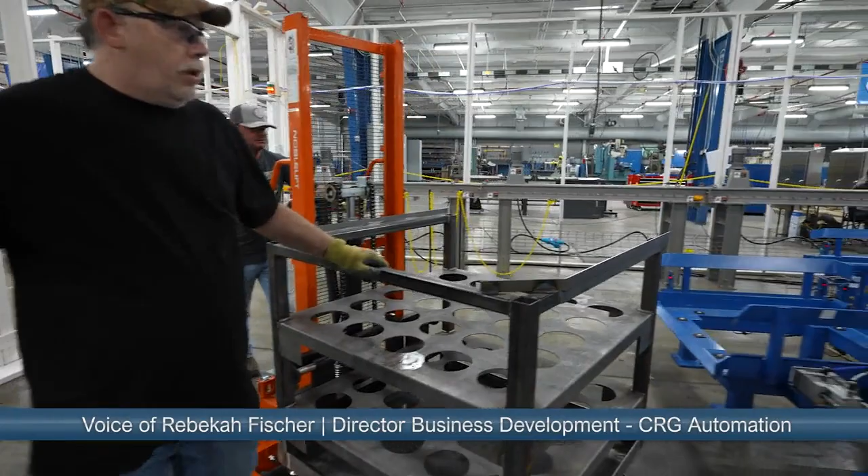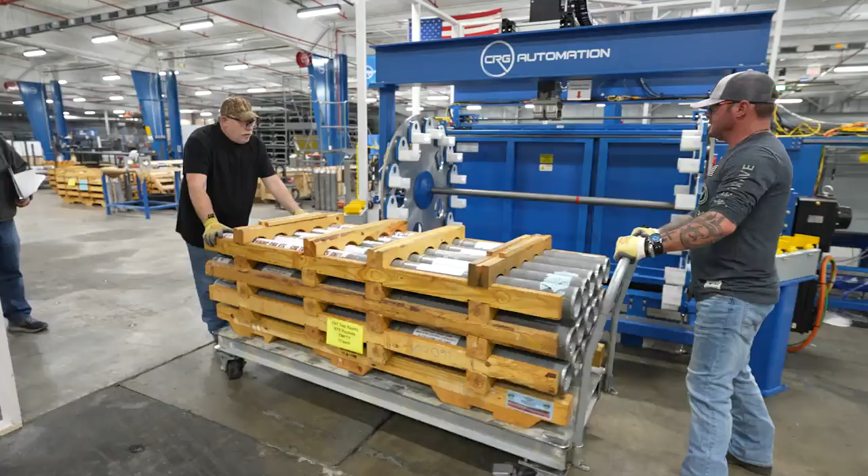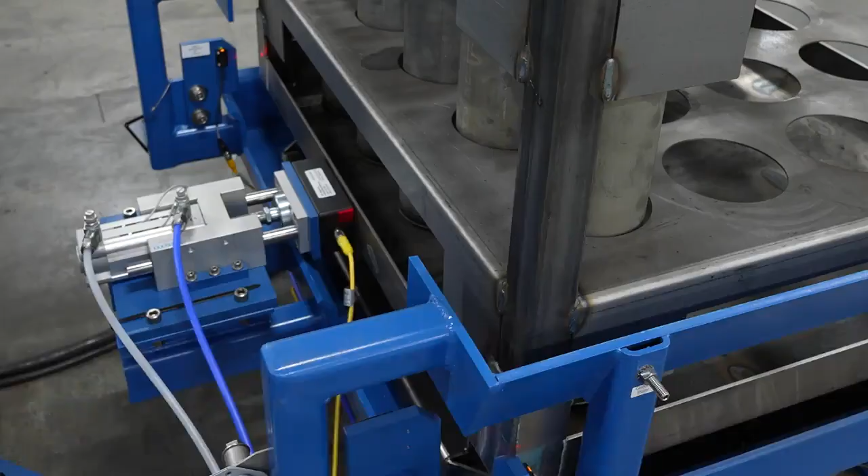To begin operation, the system must be preloaded with 3 Rocket Warhead Containerization System skids, 2 rocket motor crates, 2 upper shipping and firing tube containers, and 15 M55 rockets. One skid will have 25 empty canisters, the second skid, 5 empty canisters, and the final skid completely empty. The RWCS stations will have magnetic pullers and pneumatic pushers to locate the skids consistently for robot operation.

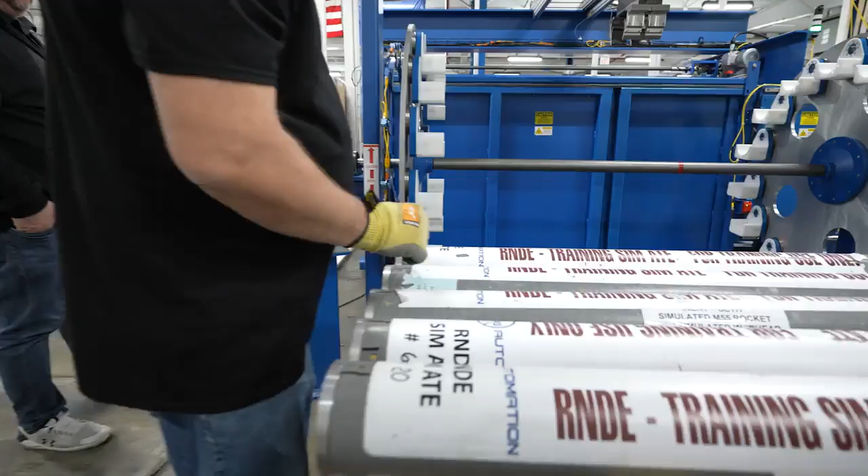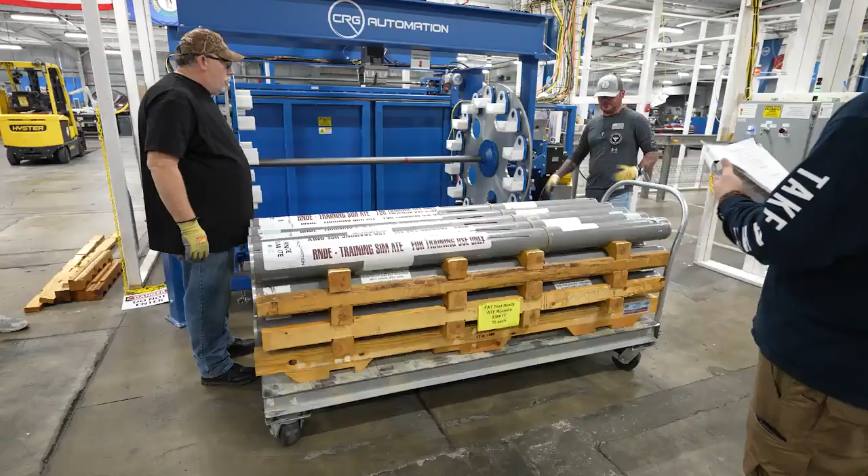4 pallets of M55 rockets will be brought into the unpack area to begin the process. This will allow a total of 60 rockets to be processed. The forklift operator places an M55 rocket pallet on the adjustable height unloading table. The operator will then mark the shipping and firing tubes, or SFTs, at the 12 o'clock position to maintain storage orientation. 2 operators will then load the rocket non-destructive examination input carousel cradle.

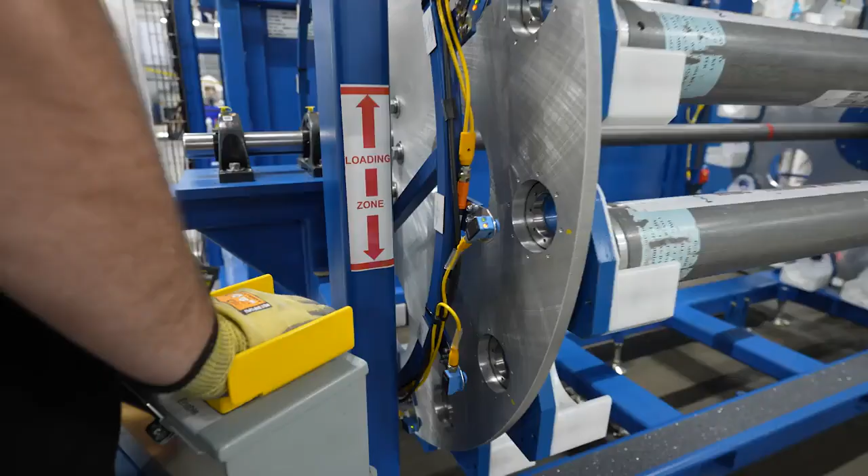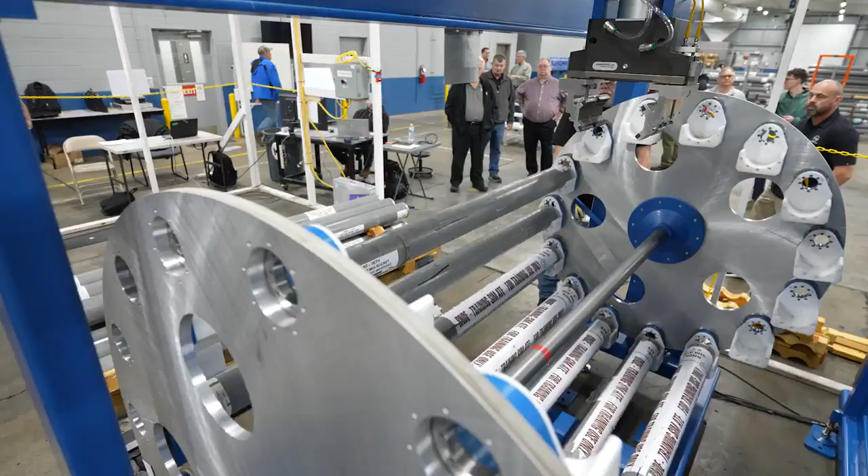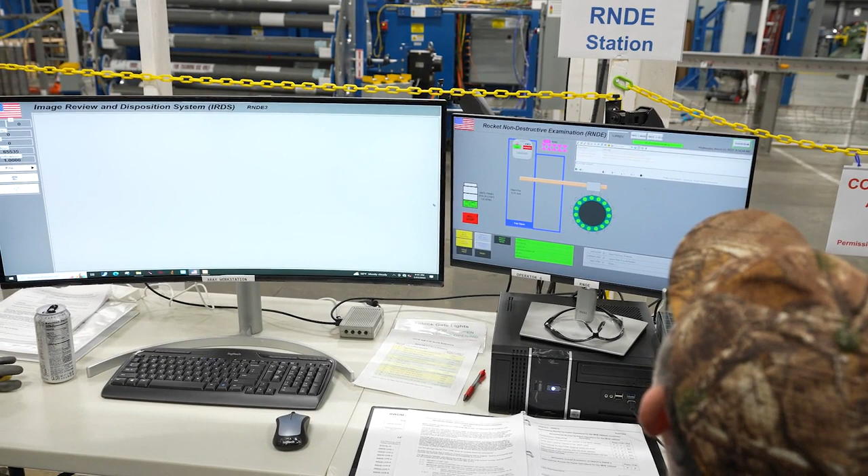Utilizing 2 sets of indexing control stations, one on each end of the carousel, each operator will press the button on their end to index the carousel to the next open position. The operators will then repeat this process until 15 shipping and firing tubes are placed in the carousel. Once the input carousel has been loaded and the unpack area operators have left the room, the control room operator can start the scanning process via the Human Machine Interface, or HMI.

Once the HMI commands have been given, the 2-axis robot will pick up a shipping and firing tube from the carousel and place it into the X-ray cabinet and close the top door. The X-ray motion sled translates over to the scanning zone and tilts the SFT 10 degrees down to allow for easier liquid detection in the M56 warhead.

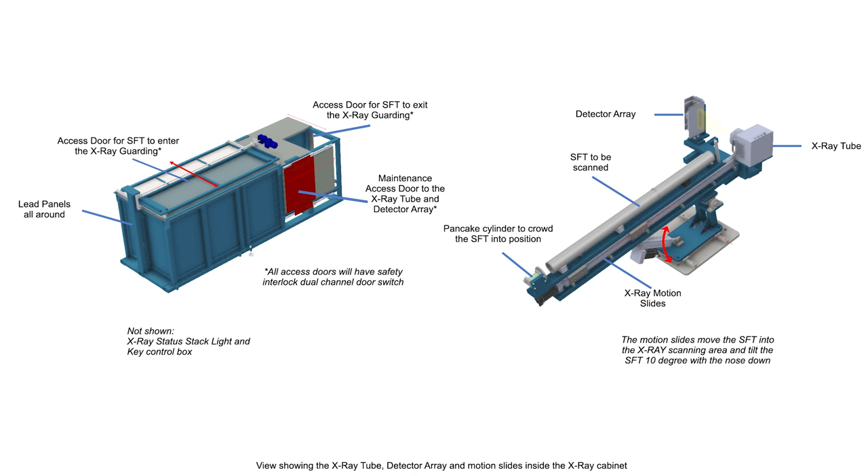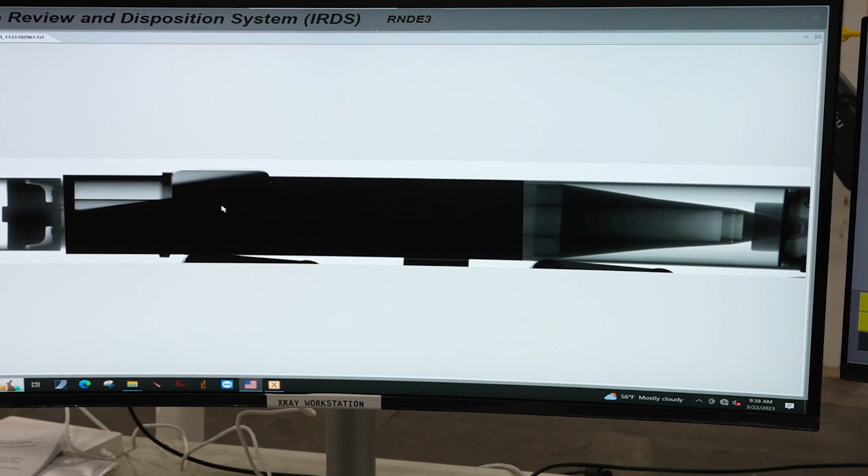Once the X-ray scan is complete, a trained operator will be presented with an image of the results to interpret on the HMI. Based on the operator's assessment, an accept, retry scan, or reject designation will be manually input into the HMI. All image acquisition and reviews will be done in the image review and disposition system in the control room.

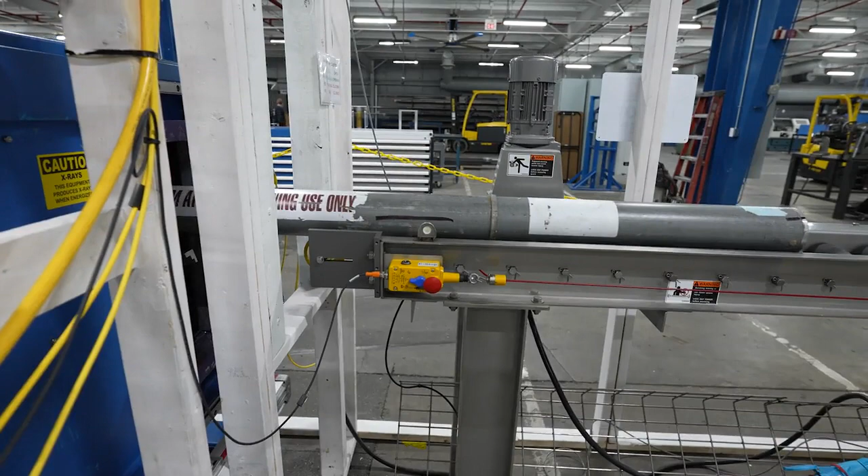The shipping and firing tube will then be conveyed from the rocket non-destructive examination system into the Alpha airlock. The rocket material handling gate nearest to the unpack area will then close. The rocket material handling airlock gate nearest to the process area will then open to allow the conveyor to move the shipping and firing tube from the Alpha airlock into the process area. The shipping and firing tube will then be conveyed to the end of the conveyor.

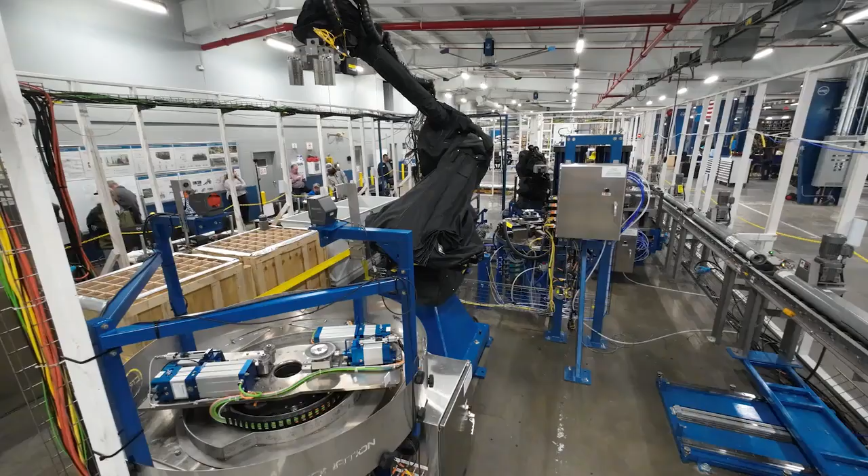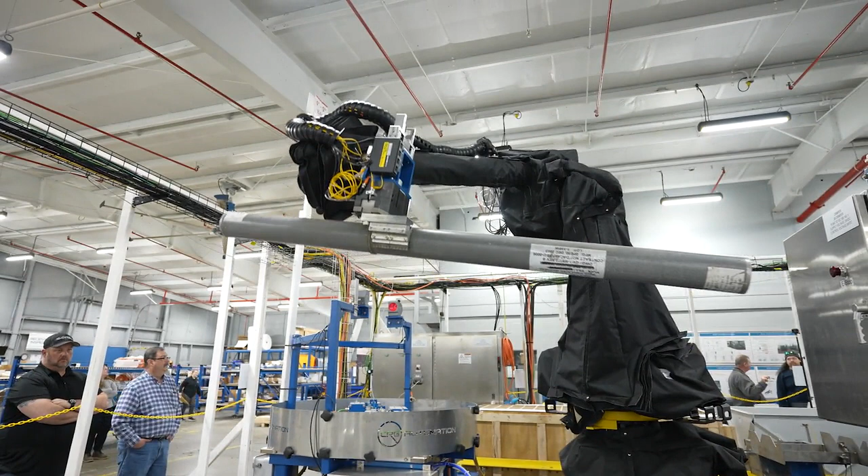The last section of conveyor is mounted to the horizontal slides that will traverse the conveyor section into the rocket handling robot's reach area. From here, the SFT will be placed into the vertical rocket cutting machine, which is the same design as those currently in use in the main plant. Once the SFT has been loaded and is securely held by the lower clamp, the cutter assembly will engage and the cutter wheel and back rollers will be driven inward to the start cut position.

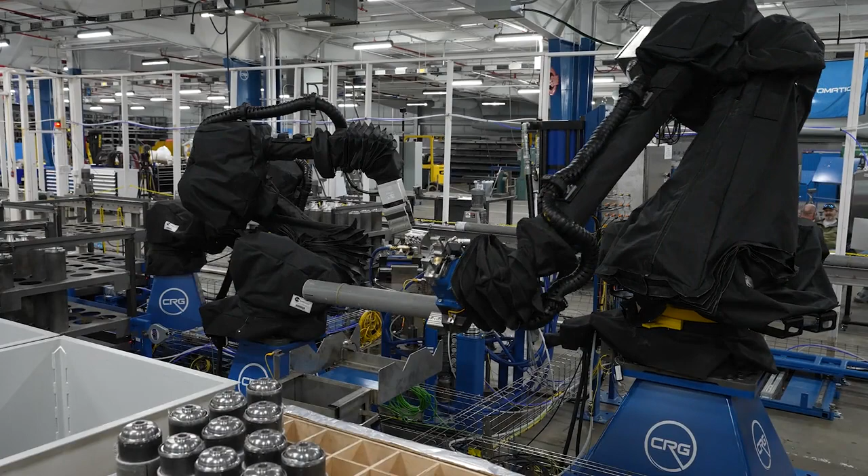The cutter assembly rotates 370 degrees, alternating back and forward bidirectionally around the statically held shipping and firing tube. The top half of the shipping and firing tube is then removed and placed on the transfer station. The robot then grips the exposed warhead with the end of arm tool, and the rotating cutoff tool separates the warhead from the rocket motor.

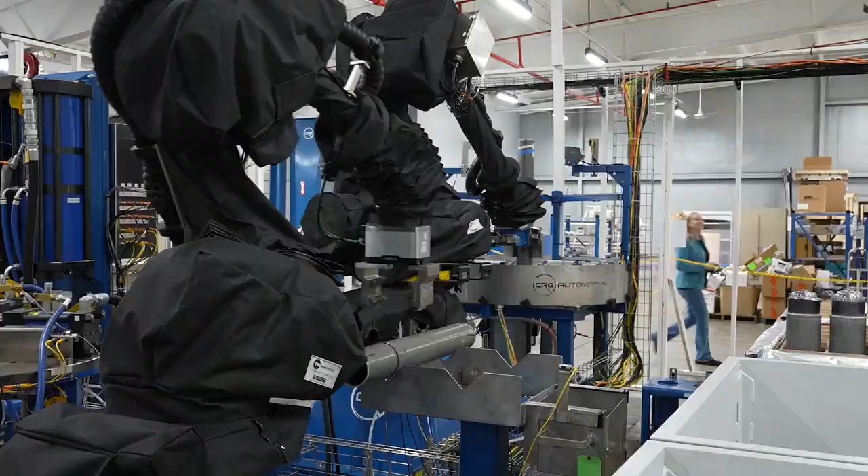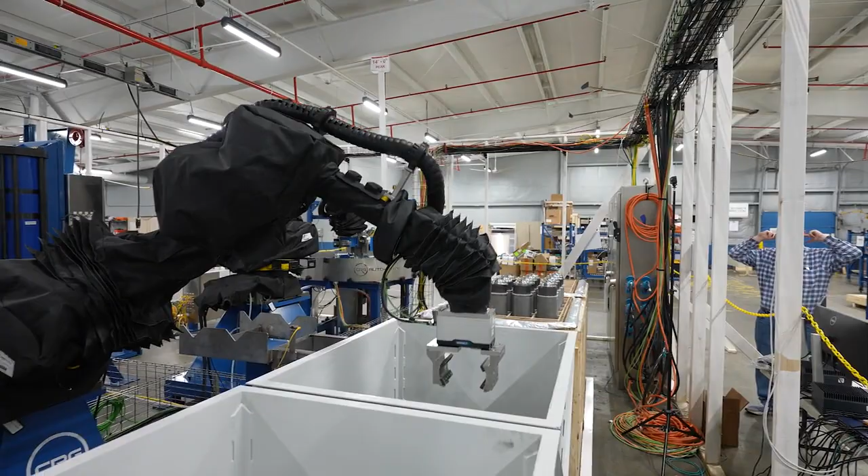The robot will then move the upper shipping and firing tube from the transfer station and place it into the upper shipping and firing tube container. The robot will then pick up an empty canister from the canister transfer and weigh station and place it into the crimp station. The crimp station will lower the canister, and the lower gripper on the crimp station will securely grip and hold the canister. The robot will then remove the top cap from the canister and place it onto the canister cap holding station.

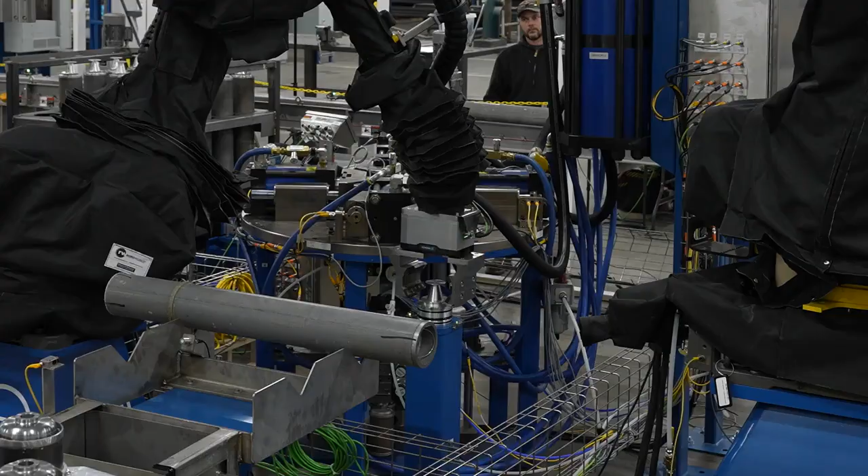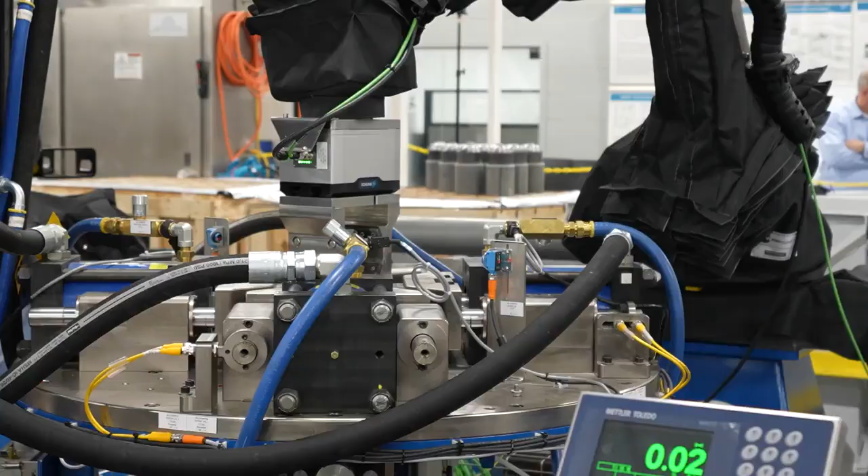The robot will then pick up the cut warhead from the warhead and shipping and firing tube transfer station and place it into the canister. Then the robot will pick the top cap from the canister cap holding station and place it back onto the canister containing the cut warhead. The canister will then be crimped. After crimping, the crimp station will raise the canister up to be picked by the robot.

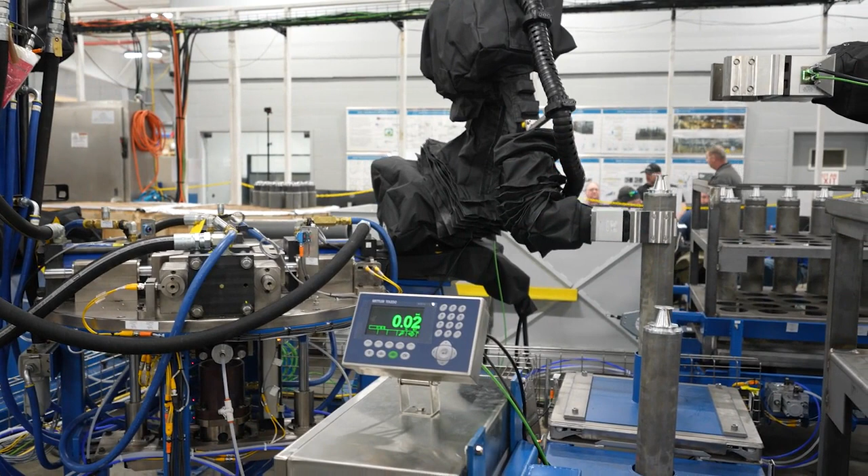The robot will then place the canister onto the scale of the canister transfer and weigh station. The weight of the canister will be recorded by the historian. After the weight is recorded, the robot will remove the canister and place it into an empty opening on the RWCS skid. This will repeat until 15 rockets have been processed. Then, a brief entry into the unpack area to support reloading the rocket non-destructive examination carousel with 15 more shipping and firing tubes. Once 30 rockets have been processed, a full changeover of all skids and containers will happen.

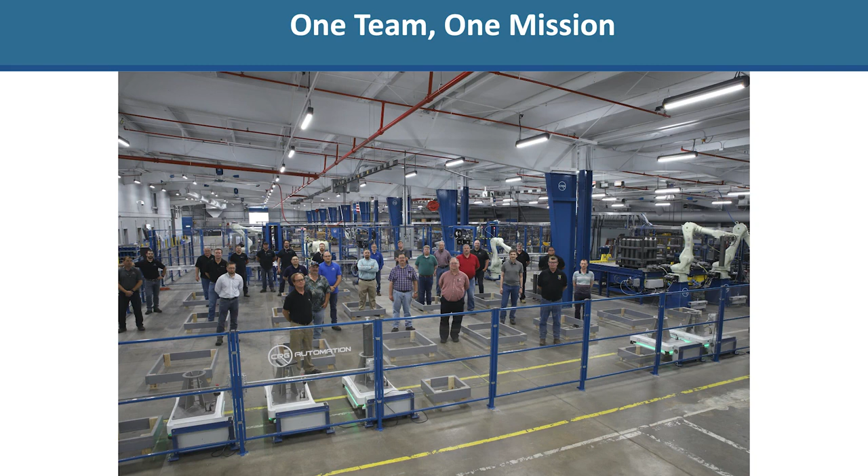CRG Automation is humbled to have worked with such an incredible and collaborative team over the last 4 years. Congratulations to all who have been involved. Mission complete.